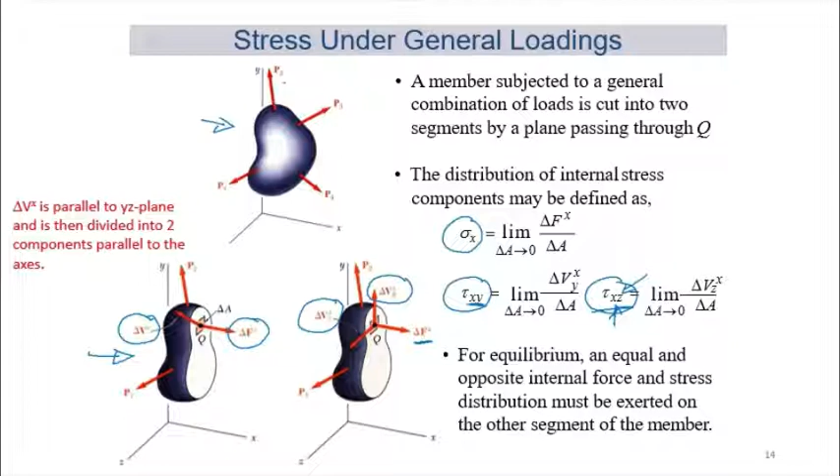Now it says that the shear stress is acting on the surface with a normal in the x direction. That's x there. And z here says that the shear stress is acting in the z direction, on the plane of x. So we find that on this single surface of Q, we have three stress components, sigma x, tau xy, and tau xz.

So if at point Q, we take out the Q element, a cubic element in the primary direction, because the primary directions are the ones we can calculate using equations in Solid 1, remember? So on the right hand surface, this is the surface that we were talking about earlier on in the previous slide, we have sigma x, we have tau xy, and we have tau xz. So we have three components.

So for tau xy, we have a complementary which is tau yx. Tau xy is equal to tau yx. Tau xz is equal to tau zx. So we have a complementary over here. These here are the complementary shear stresses. So in the other three surfaces which we cannot see behind the stress element, we also have complementary normal stresses and shear stresses.

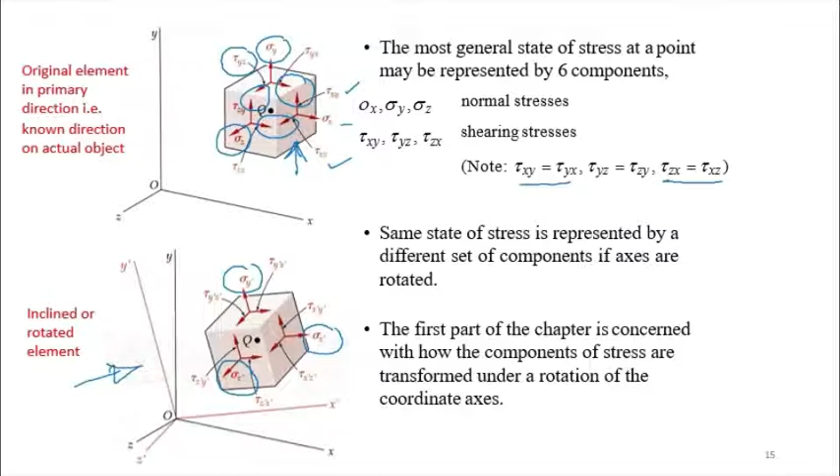So we have sigma x prime. Sigma y becomes sigma y prime because the y-axis has been rotated as well. And sigma z becomes sigma z prime because the z is also rotated. This is 3D rotation of the element. Similarly for the shear stresses, they are now not the same value as given in the top diagram.

Alright, so those are the stress elements that you learned in Solid 1. Now, when we talk about stress transformation, it is how do we find the values of the stresses when it is not in the original direction. The top diagram is the original primary direction. What if we rotate? In the bottom diagram, we rotate the stress element.

So our problem then, we have two things that we want to find. Number one, if we know the angles that they rotate through, then we can determine the final values of the stresses. In simple words, what are the values for the stress components when the plane is at an angle to the main or primary axis?

In other words, we want to find sigma x prime, sigma y prime, sigma z prime, and also the three shear stress components tau x prime y prime, tau x prime z prime, and tau y prime z prime. This diagram shows that it is a 3D problem. Now 3D stress transformation is a complex problem, much more complex than we can cover in this chapter of Solid 2.

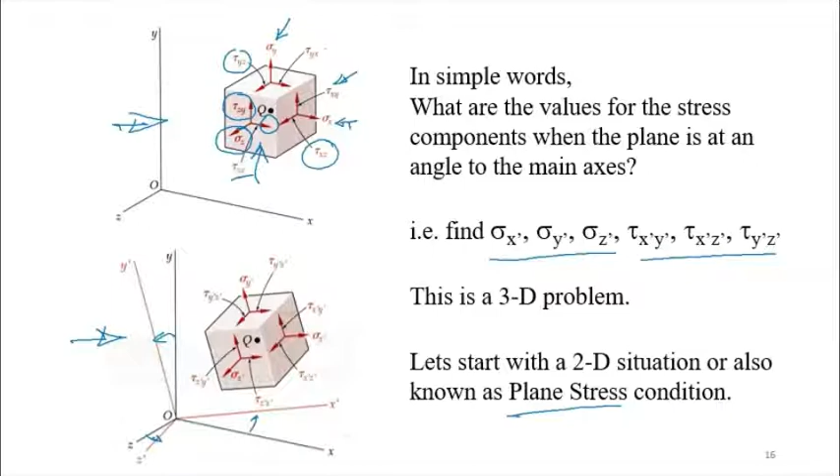If these 3 become 0, then we are left with another 3: sigma x, sigma y, and tau xy or tau yx. They are complementary. This one is also 0 because they are complementary to the front shear stresses. So we have only 3 stresses remaining, and that converts the problem into a 2D problem, which we call plane stress condition. Plane stress, tegasan satah.

So first we need to understand what is plane stress. Plane stress is a state of stress in which two faces of the cubic element are free of stress. Remember, the front surface here is on the surface of the object, so there are no stresses on that surface. Similarly, on the rear surface there will be no stresses as well. So we are left with sigma x, sigma y, and tau xy.

So we are left with sigma x, sigma y, and tau xy, which is complementary to tau yx or vice versa. We only have 3 stresses to define, while the other 3 are 0. Then you might ask, is that all for plane stress? Is it just on the surface of an object? There's another plane stress condition, which is the second diagram here.

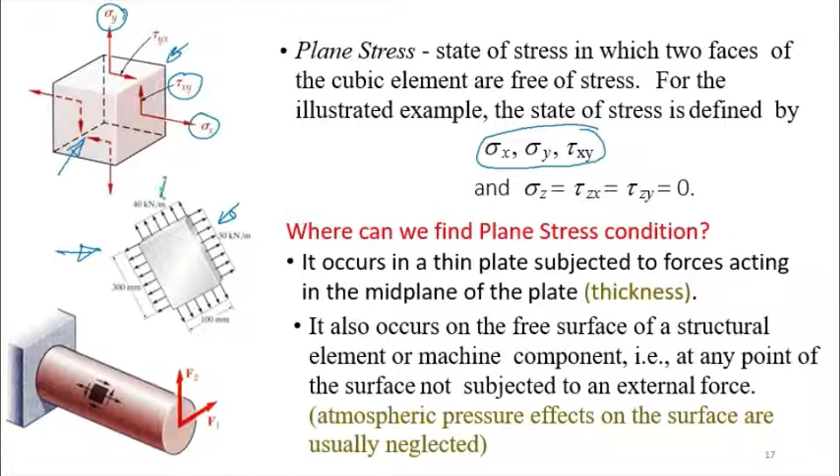Plane stress also occurs in very thin plates with the forces or stresses acting in the mid plane. These forces act on the mid plane of the thickness of this very thin object. Therefore, there's very little stress gradient within the thickness itself, and we have 0 stress on this surface and on the other surface at the back. And so this is plane stress condition.

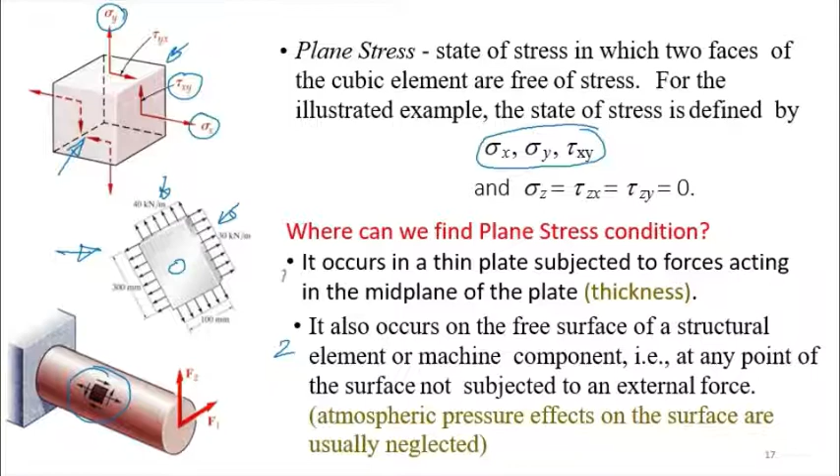Now this is what I mentioned earlier at the bottom here. The stress element is on the surface of the object, which is not acted upon by any significant external loading apart from atmospheric pressure. So that's the second location where you can find the plane stress condition. This is number 1, this is number 2.

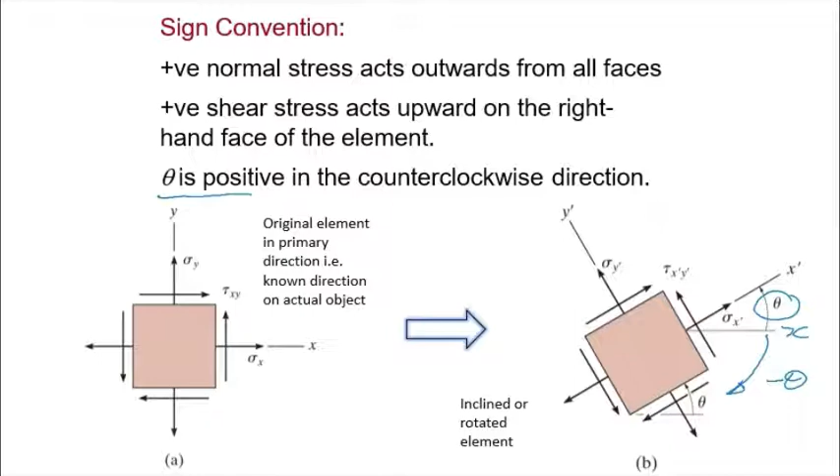So that triangular element, if we take this bottom part here, we'll have this x. Originally we have x there. So now we rotate it counterclockwise theta to reach x prime. The perpendicular direction is y prime. They are always at 90 degrees to each other.

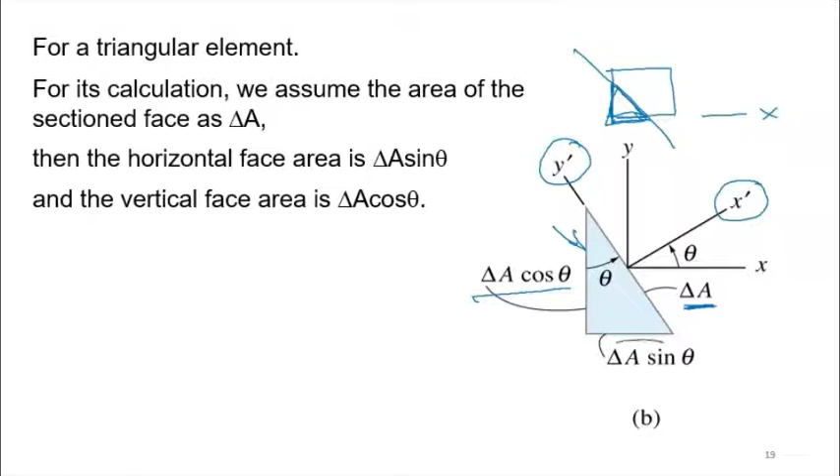And before we do our analysis on the triangle, first we need to define the area. Now, the slanted surface is delta A, right? That's the primary area for the analysis. While the vertical surface here is delta A cos theta, and the bottom surface here is delta A sin theta.

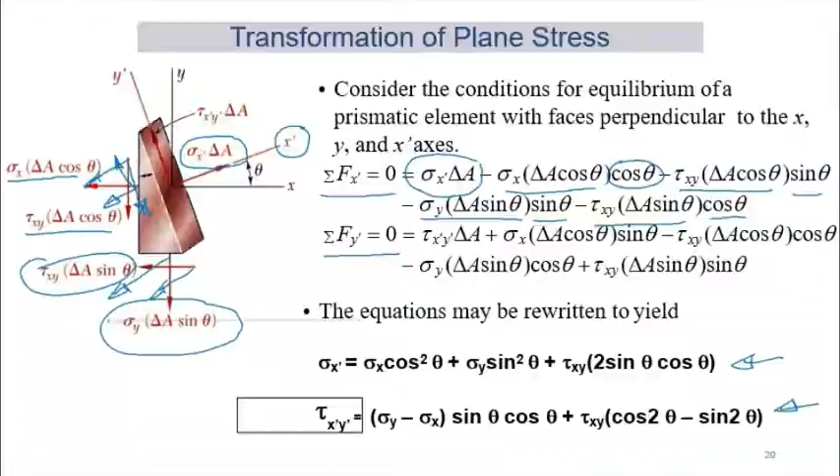So what do we do next? We have to simplify these equations further because we don't want to calculate cos squared theta and sine squared theta. So we can simplify them using trigonometric identities from your mathematics. Just use them to simplify the two equations. And if you replace them and simplify, we'll get these two equations here. That is equation number 1. That is equation number 2.

Now these two are the basic equations which will give you the normal stress on an inclined plane, sigma x prime, and the shear stress on an inclined plane, tau x prime y prime. So we will just use these two equations if we want to find stresses on an inclined plane where the inclination is given by theta. We just replace the value of theta, remembering the sign convention from earlier.

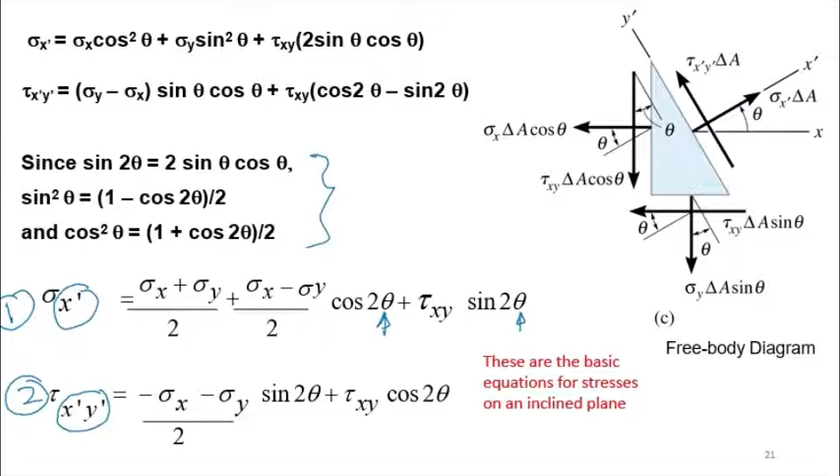Let's take a look at an example. In this example, we have a stress element taken on the surface of the fuselage of this airplane, or in simple words, the body of the aircraft. In technical terms, it's called the fuselage. Now, if we take that stress element on the surface, this diagram gives you the stress element with the loadings, assuming that the loadings have been calculated or measured.

So now it says find the stresses acting on the element when it is oriented 30° clockwise from the position shown. So how do you find that?

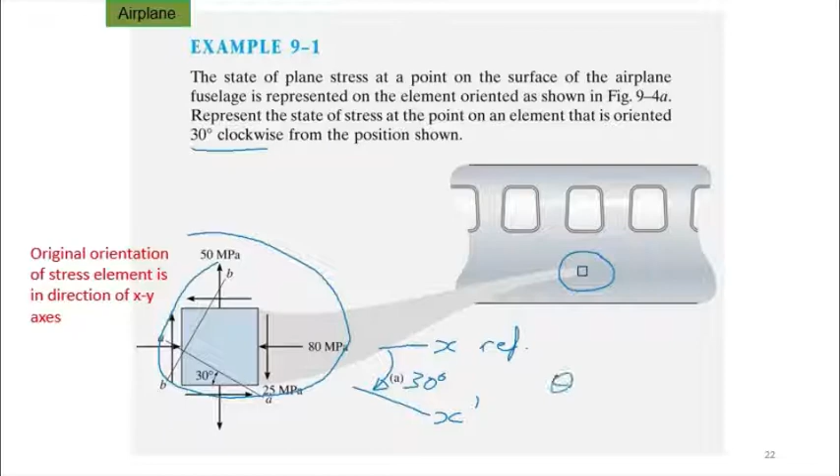Remember, this is the primary direction. So if we rotate 30 degrees, this is x. 30° clockwise, we are going towards x prime. And that angle will be 30° clockwise. In other words, when it is clockwise from our reference, this is our reference, right? When it's clockwise, theta is negative, right? So theta is negative.

Now, we can use the final equation we have derived. However, we can also use our triangles, remember? So the first triangle will be this here, that one here, and this inclined plane. If you take that triangle out, we will have a triangle like that, right? On this surface, we have that 50 megapascal, okay? And the shear stress, which is 25. So that's 25.

On the left surface, we have 80 megapascal, which is compressive. So we have 80, right? And we also have the shear, which is 25. So now x prime is in that direction, right? So that's x prime. So we need to find the value of sigma x prime and also tau x prime y prime. Because if this direction is x prime, then that direction is y prime, right?

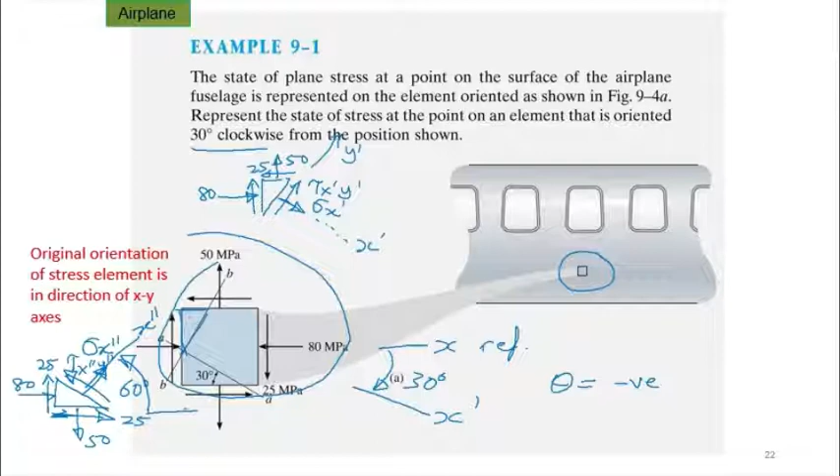So if you remember the positive directions of the stresses and the angles, the sign convention, then we can use the final equation that we had earlier, or derive it from first principles using the equations of equilibrium. Don't worry about delta A. Don't ask what delta A is, because finally you can just cancel them out. Okay, so here is the solution. Summation of Fx prime is 0.

Now if you look carefully at this equation, they all have delta A. That's the area, right? Delta A cos 30, delta A for the inclined plane, and so on, because the angle is 30 degrees here. So finally you can cancel out delta A, because every term has delta A. Don't worry about delta A. So from this equation, sigma x prime for the first diagram will give you minus 4.15. Minus 4.15 tells you that it is compressive, because we assumed in the first place it is tensile, right?

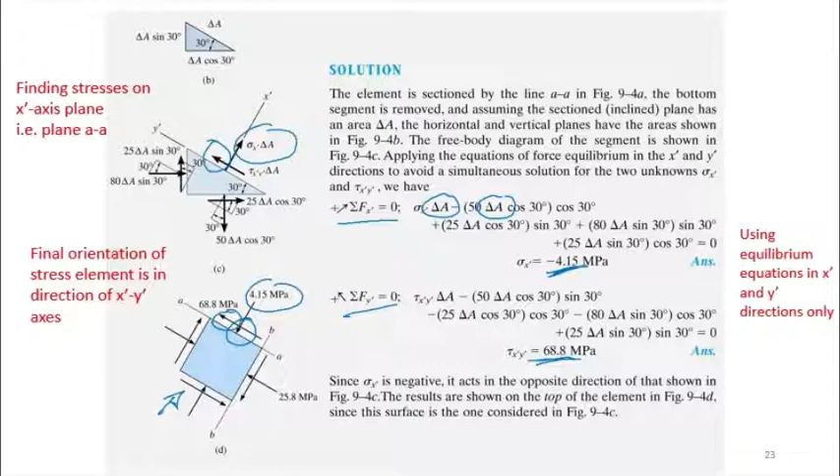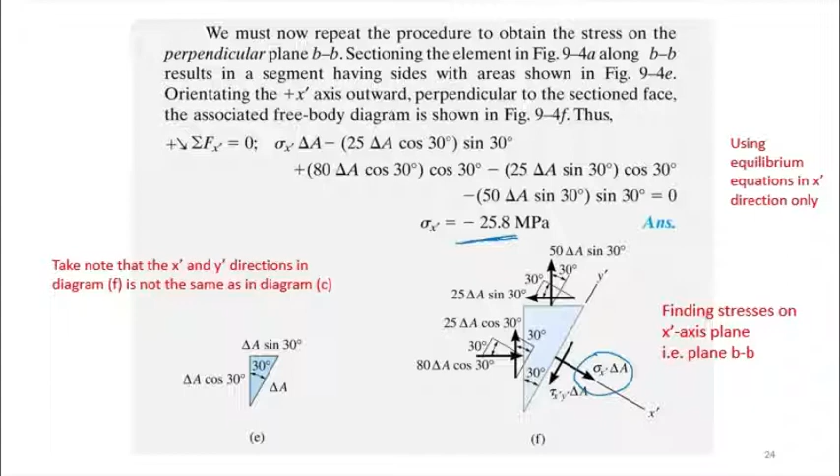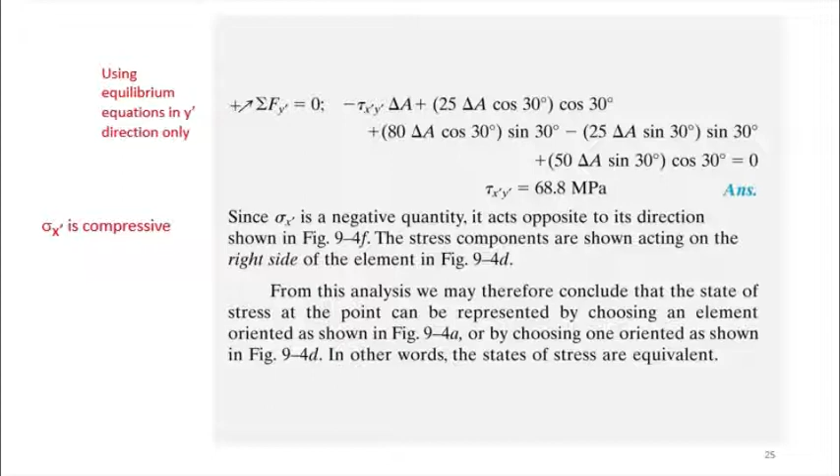Now we need to find surface BB using the other triangle. Again, you do the equilibrium of forces, and we find that sigma x prime is negative 25.8. Our assumption was a positive direction, but the answer is negative, meaning it's compressive. You can have a look at the calculations. And from summation of Fy prime is 0, we find that tau x prime y prime is positive, because it depends on your assumption, right?